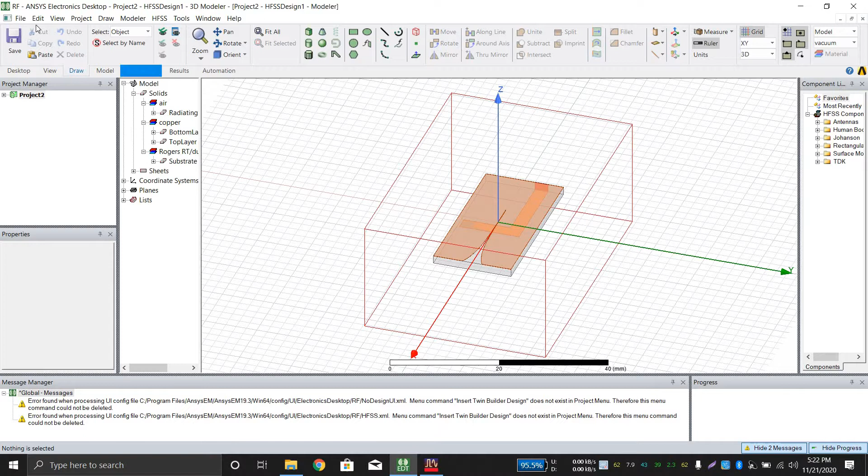So this is a Vivaldi antenna. Some antennas are one layered, top layered or bottom layered, but this is both layered, so in this tutorial both cases will be discussed. First of all, delete this airbox, then select this top layer, click on Modeler, and click on Export.

Here we can say it's the top layer, so I'll name it top layer and choose DXF. It can export in DXF format, which is not well supported by the machine, so first we need to convert it into a Gerber file. Click on save, and now do the same for the bottom layer.

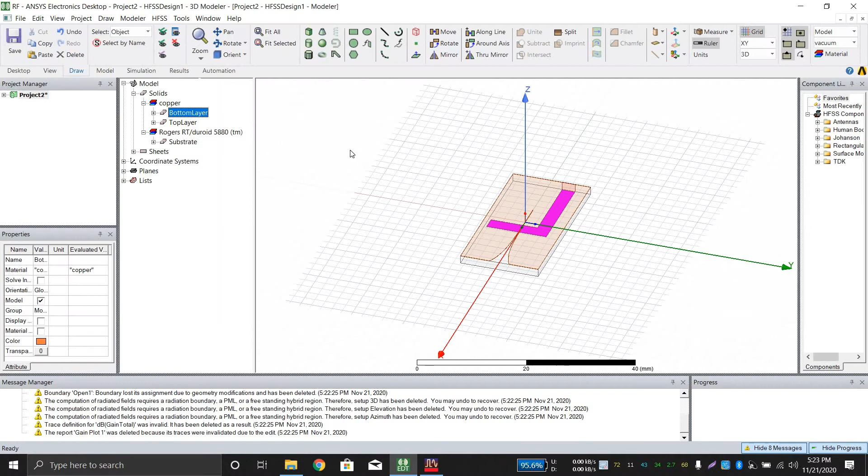Click on it and export, and name it bottom layer. Save in the same folder. It's not necessary, but we can also click on the substrate and export it as the board outline, so I'm naming it outline. Save it. So our task here in HFSS is done. Close it, don't save it.

Now create a new workspace, create a layout, and select millimeter. Our design was in millimeter, so better select millimeter, otherwise your fabrication will not be correct. Click on File, Import, select DXF, then options. First we have to import, so browse.

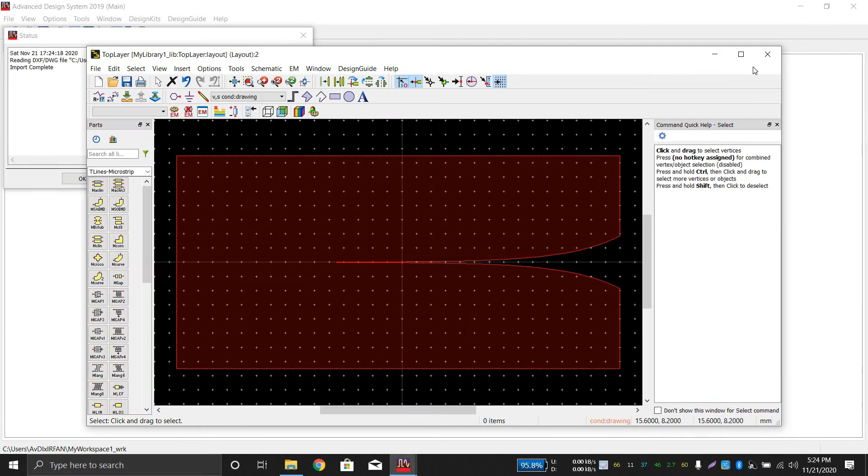These are the files. First I will select the top layer, then select millimeter again, OK and OK. So we have the top layer. Now we have to set some options. Click on View, Docking Window, and Layers Window.

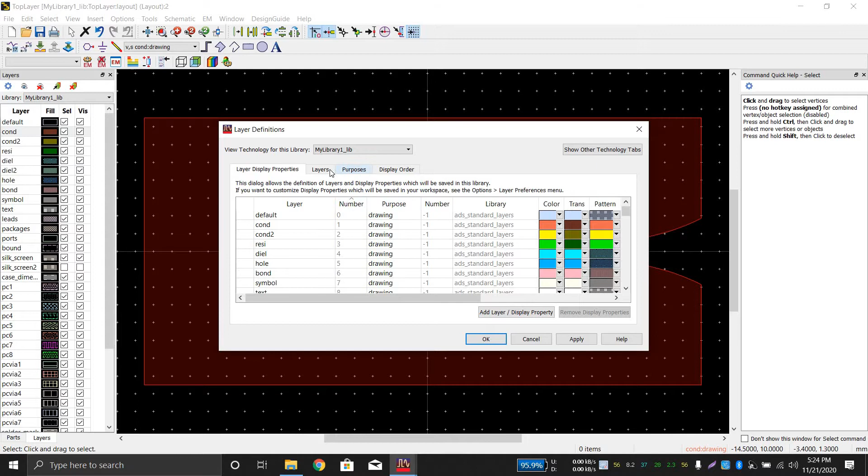These are different layers: conductor, conductor 2. You can see the top layer is like this. Now click on Technology and Layer Definition. Click on Layer, Add Layer. Don't worry about this. Layer 40 is the new one, so I will name it top.

The process role should be conductor, and it should be bounded to itself. Click on apply, and now this color is here. Now we have to convert this top layer into just top, so that it fills our purpose. First we need a properties window: click on View and Properties Window.

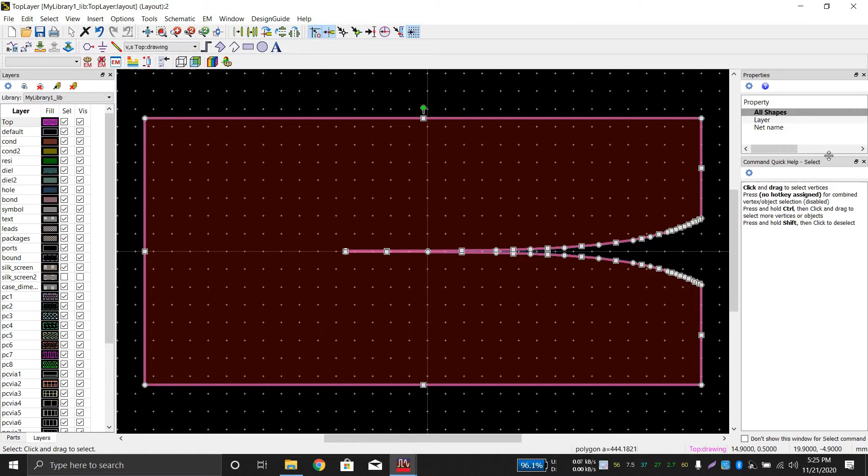Click on this layer and just click on top. Done. You can hide it and show it, so just this one is there. Now this is the top layer. To convert it into Gerber, click Export and then Gerber/Drill.

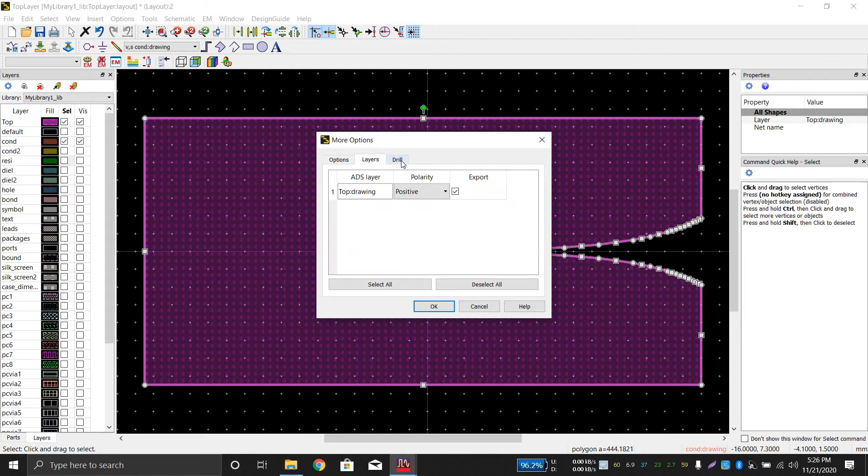Check the options. For more precision, if your machine supports it, make it 3, if your design includes up to 3 decimal points. And millimeter is always a problem, so check it every time. The rest is good. Browse, I'll put it on the desktop, select folder and OK. Export has been completed for the top layer.

Let me check the file. Here it is, this is the file top. I'll move it into a folder for safety. Now let's import the bottom layer. I think options were already selected, but better check these things, because once they go to the machine, things are out of our control.

Bottom layer. Now we select the bottom layer, with the same options. So now it will be the same; we have to do the same thing again.

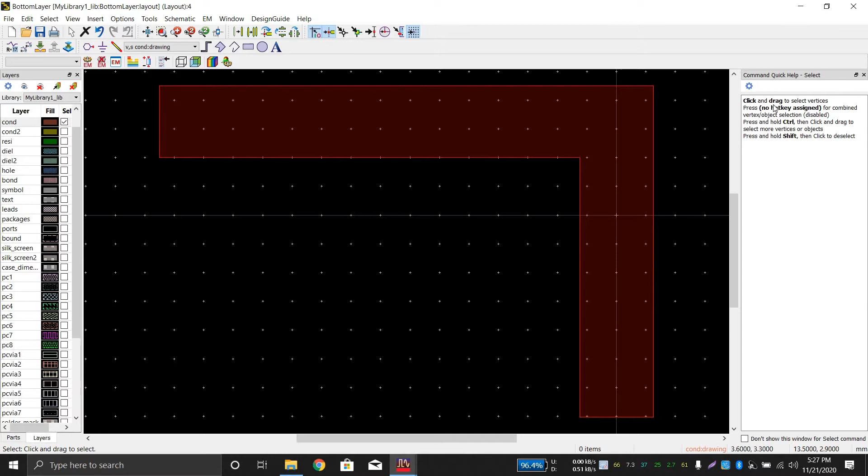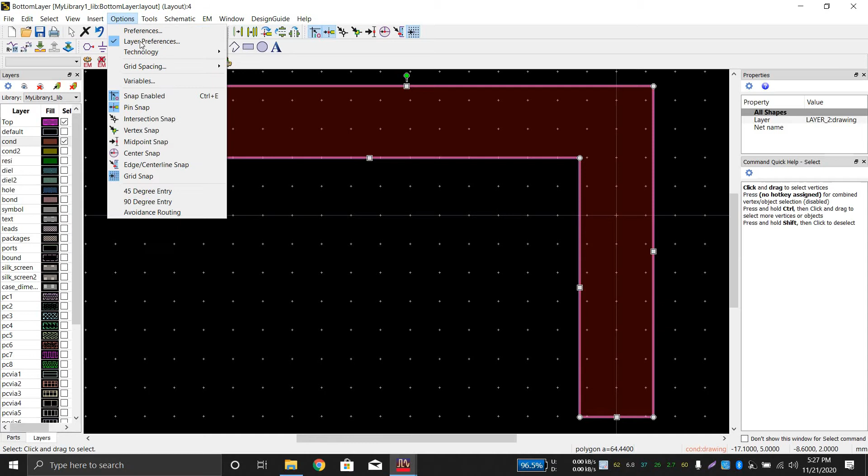Actually I didn't save it, so that's why I have to do it again. View and this property also. So this is actually the layer 2. Okay, so layer 2 structure. So we have to convert this into another one. First of all, you have to define another layer. Click on this technology layer and add layer. Let me show it. Okay, so this is another one.

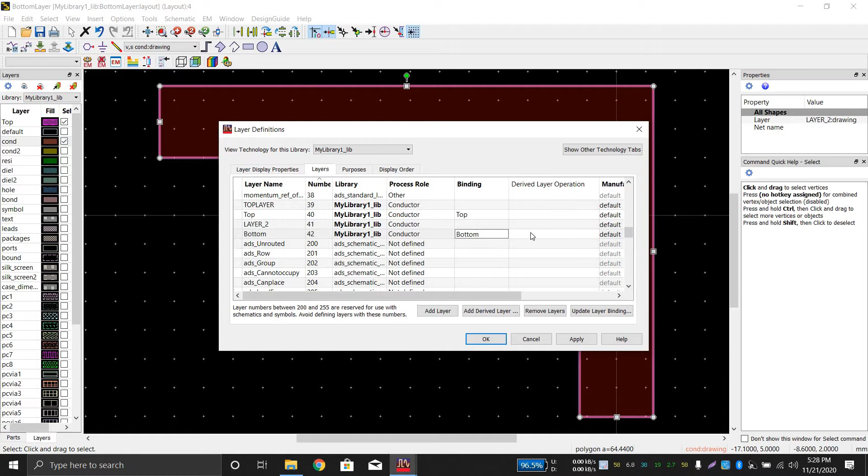Okay, so I have to just say bottom, and just like the top layer it is also a metallic layer, so it's a structure, so I have to just bind it to itself. So that's it. Okay, we have created this one. So first I will click on this one, and because the properties window is there, I will just click on that and just click on bottom.

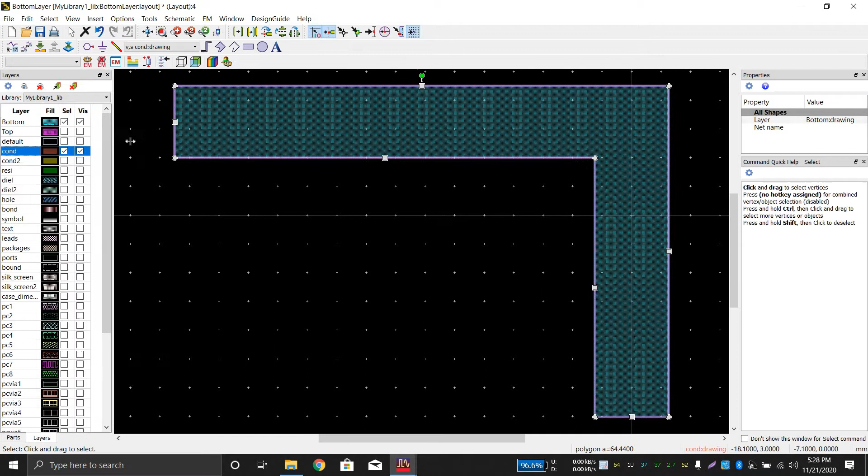So I will just hide everything else and just click on this. So now I have this selected. If other things are selected, then they will also be exported, so I don't want that to happen. Just this should be selected. You can clearly see these are the options: hide all layer, show all layer, and then I just click on this one and click on the export.

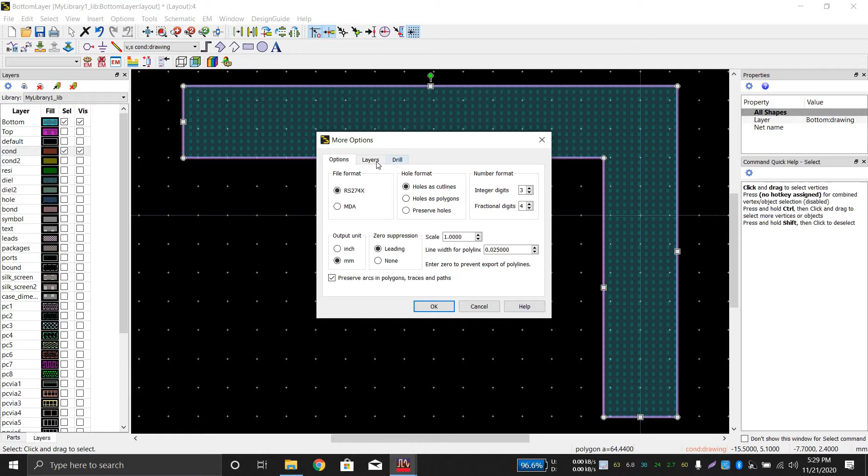Gerber drill is already selected. Browse, I will just put it the same in the desktop again. Okay, millimeter 3 and things are good. It could be 2 or 1, whatever you do, that's okay, but it depends on the bit size of the machine cutting tools. And click on OK. So that's done, but the main part is the outline.

So 2 are done now. I would just like to move it into this, and after this we will verify these things later. So let's import the third file, which is the board outline, commonly known as board out. You can manually create it in CircuitCAM, but if you just directly do it, then it will be much more precise as from your design.

So what else? Okay, it's selected. Options are here. Okay, everything's okay. Is there something wrong? I don't see it, but this outline, yes, of course it is. So the same, so it will also be a reminder for you. Layers window, and

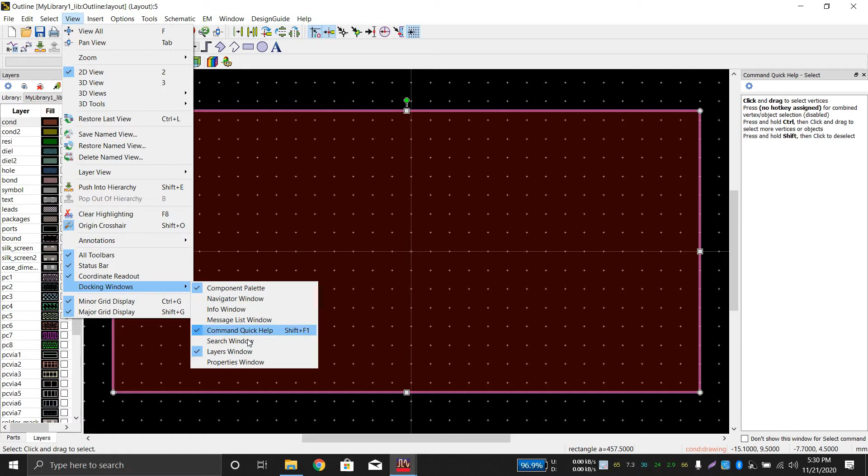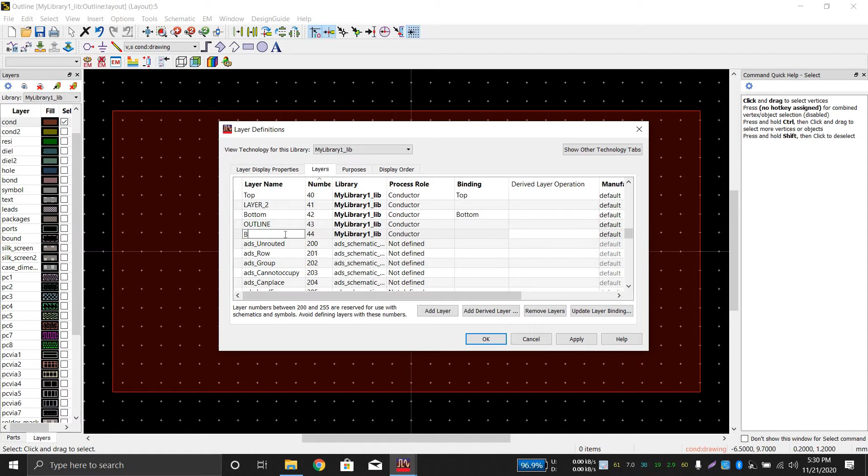what else? Okay, first of all, I also have to define the layer. In this I don't need the properties, because I don't have to shift it. I just need to make a layer for it, the bounding area layer for outline. Layer definition, add layer. Okay, so I will just call it outline in small. Just remember this difference. This is the file I imported, and this is now the next one. You can also name it on your own, but I like the same name.

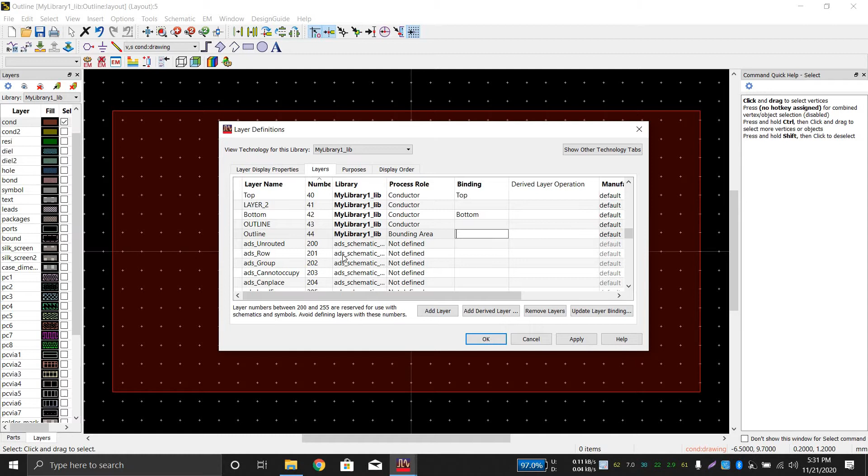Where's the bounding area? Yes, you don't need to bind it to itself, it's an outline. So now this outline, where is it? Okay, it's the same color as bottom, I just don't like it. And to remove any confusion, I have to select it and just click on this one, so it will just point to the edge, and just click on this polyline, click on this, on this, and so it will be a perfect shape.

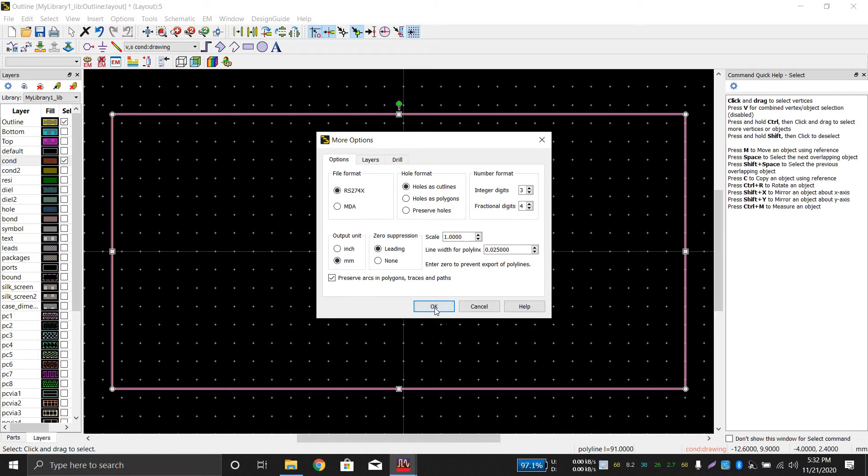So if you just hide everything and then just click on it, it will be visible to you. So it is the board outline, that's for the boundary of this design. So the design will be constrained in this boundary. Export it and browse the desktop, the same place, doesn't matter. I always do these to verify. Once I made a fabrication, it was in mil, and then the design was much smaller than required.

So that's it, everything is done. I don't need to save it. Where's the file? Okay, so these are the files. Let's make a DXF and I should keep the gerbers. Pardon me, but I have to do it. So let's check these values.

Let's check these files. You can simply import them in ADS or HFSS, but this CircuitCAM software is basically used by the fabrication units to make the CAM files and job files to be forwarded. So I use it to verify these designs before even giving them.

Okay, Gerbers, top, click on top, and Gerber X is the format, top layer. By designing in ADS, you just know this. Okay, this is correct because my design was 15 millimeters, and I know it. I can import, and this is okay.

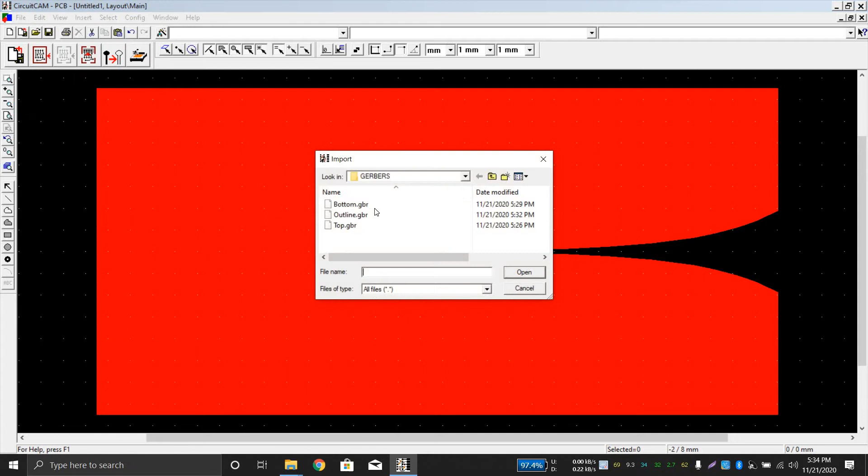If I import another, the bottom was like this obviously, but let's change the bottom to a different color. Okay, this is here. This is the bottom layer, and now first of all I will import the outline. For the outline, you have to choose board outline and import.

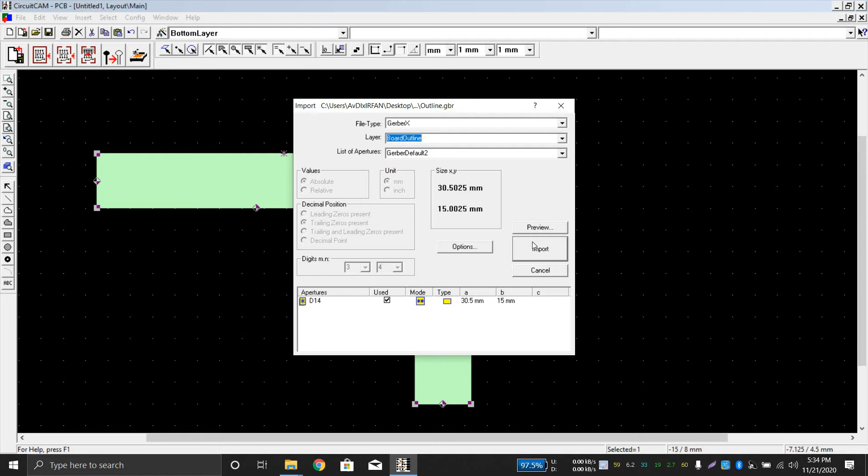Okay, there's an issue here. This is the issue I was talking about. I have to make it again. That's good that it happened now. So let's do it. It should be just a boundary. It should not be something like a metal, because it will just cut through it. So I will just go to the top layer, design, import again.

You'll be thinking that he doesn't know himself, how would he teach us? But these are the things you encounter.

Okay, I will just go to the top layer and manually make it, or I can make it again. No, I will just go to the outline. Actually, I forgot to delete the previous design. That's the reason. Wait a minute. Actually, I have opened so many designs that I should delete this outline.

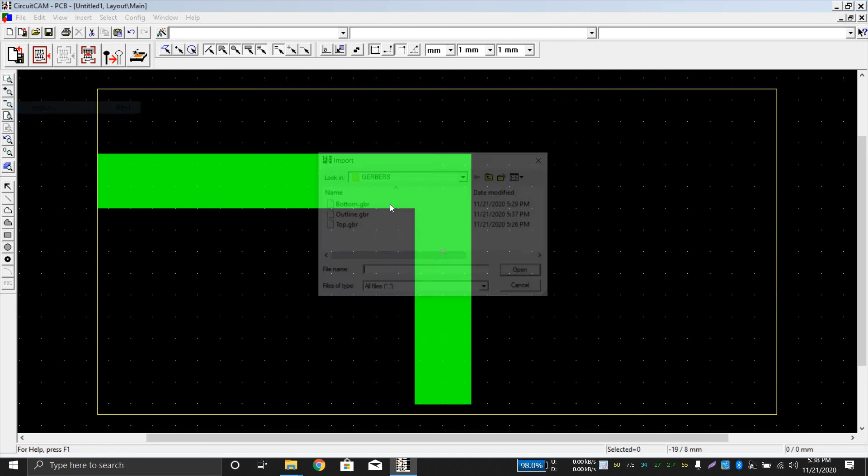Now that's perfect. This is how the board outline actually is. Let's import the bottom one so we can see it. Select it, bottom one, import. That's perfect. Import the top at the last, select this one, import. Okay, so that's perfect.

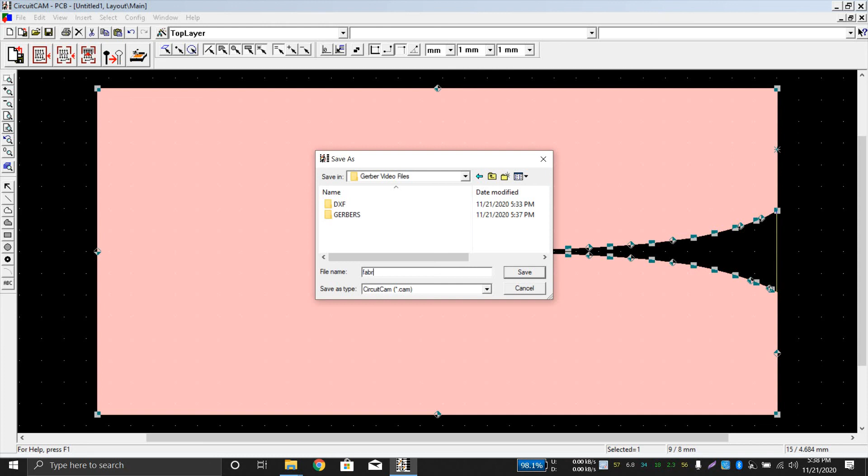Now it is up to the fabricating agency to do with this, and then the lab staff will do all the fabrication. Now the file is okay for the machine, and that's how you convert a DXF file into a Gerber file from HFSS into ADS, and then verify it through the CircuitCAM software.

Even if it is any other software, this is one of the software for verification of these designs, so that you can change it, because it just took me 1 or 2 minutes to change it. So these are the actual files. This is the CAM file. It's up to them now.